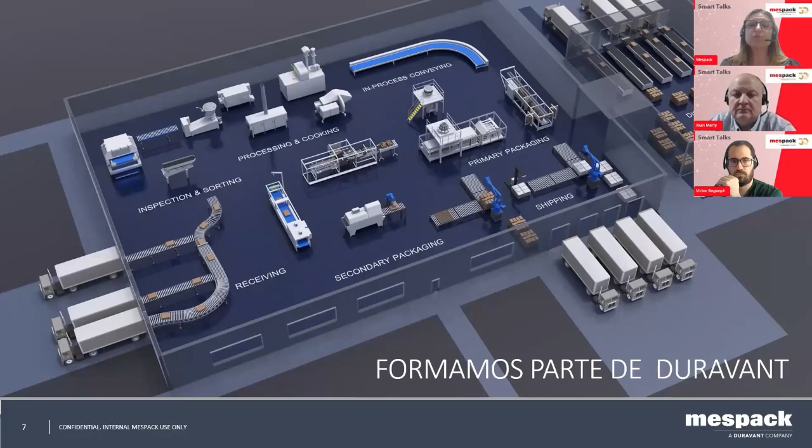So today we are going to cover different topics about turnkey solutions and secondary packaging. But first, let me give you a quick overview of Mespack. Mespack is headquartered in Barcelona and is a global leader of flexible packaging equipment for consumer packaged goods. We are known for our innovation and creating sustainable packaging solutions. We are part of Duravant since 2015. Duravant is a leading player in the world of industrial equipment headquartered in Illinois. It's a global engineered equipment company with manufacturing, sales, and service facilities throughout North America, Europe, and Asia.

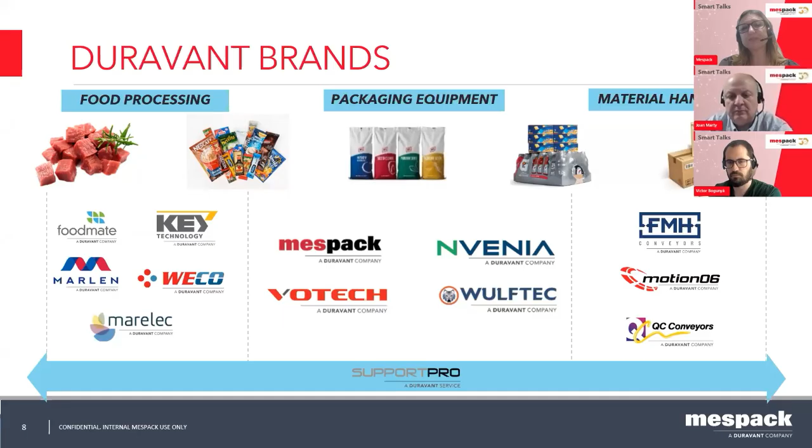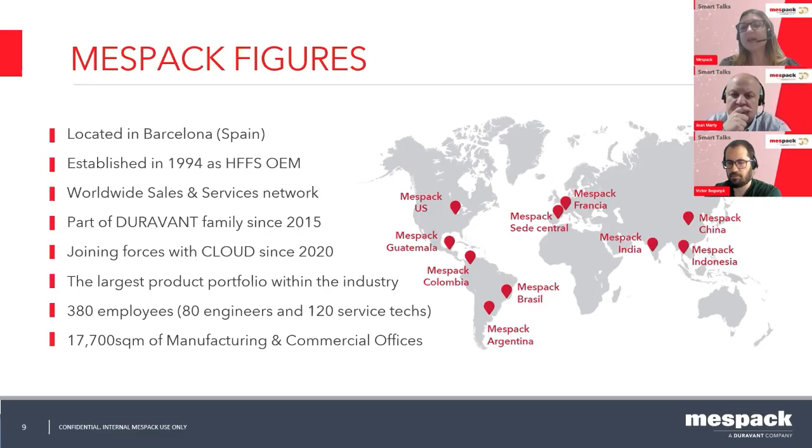Here you can see that Duravant offers immediate and lifelong aftermarket support, serving food processing, packaging, and material handling industries worldwide through its diverse portfolio of operating companies and brands. Mespack was established in 1994 as a horizontal form, fill, and seal manufacturer. Mespack has evolved into a global one-stop shop with extensive services, with a sales team in over 90 countries and regional service centers, ensuring prompt access to parts. We boast the industry's largest product portfolio, with 380 employees across 17,700 square meters of facilities; our production centers are in Spain, the US, and India.

We provide solutions for various industries, including food, beverage, pet food, pharmaceuticals, personal care, and home care, but also lawn and garden, agriculture, tobacco, automotive, among others. At Mespack, our talented engineering team designs customized integrated solutions for primary, secondary packaging, and end-of-line processes, as we will see today. We offer high precision, efficient, and versatile horizontal form fill seal machines for flexible packaging, including machinery for pre-made pouches and a wide range of vertical form fill and seal equipment. Additionally, we provide Hydroforma machines for water-soluble pods and end-of-line equipment for your secondary packaging needs, offering turnkey solutions and a complete project if required.

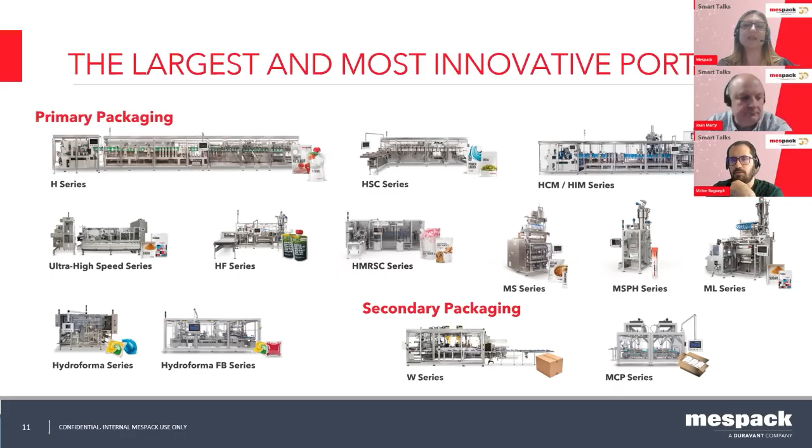So we will go into more detail on this today. This marks the end of our introduction to Mespack, giving you the opportunity to familiarize yourself a little bit more with who we are. And now, Joan, I'll pass the floor to you. Thank you.

Thank you, Monica. Well, first of all, in order to have a clear picture, we would like to show you a video of a recent project that we manufactured here in Barcelona, and that is near to be delivered. It will allow you to better understand, surely most of you know, what we can propose to you. Okay, so.

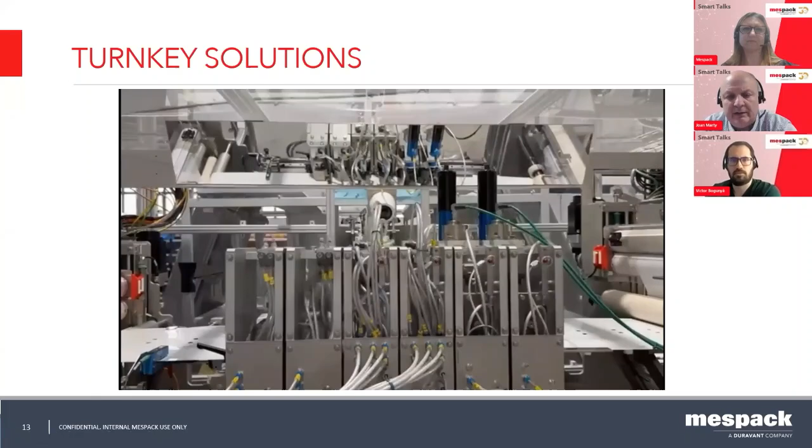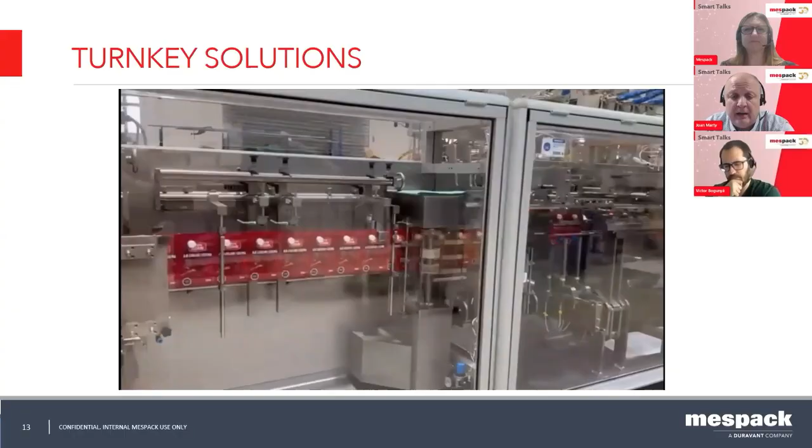Okay, this is our horizontal machine model 320. That is a duplex machine, and for this project we are filling pouches with 400 or 600 grams of paste, mayonnaise, or tomato paste. Also, in this format, you can see it is around 300 grams.

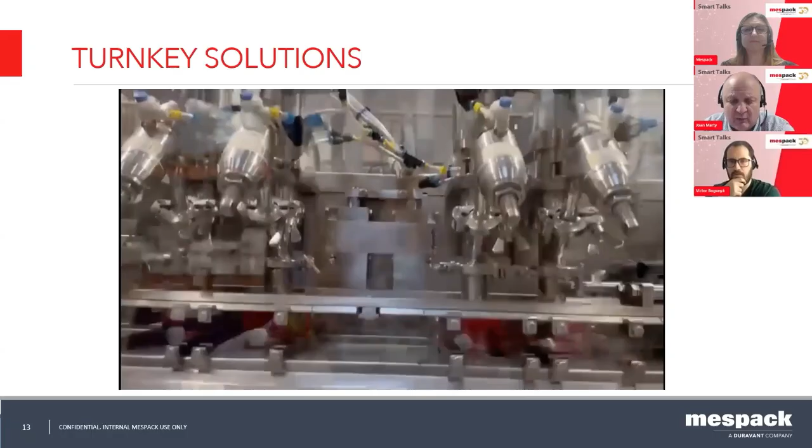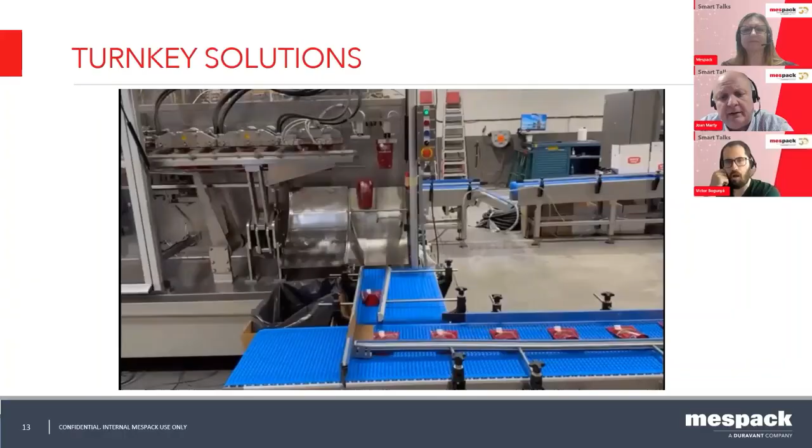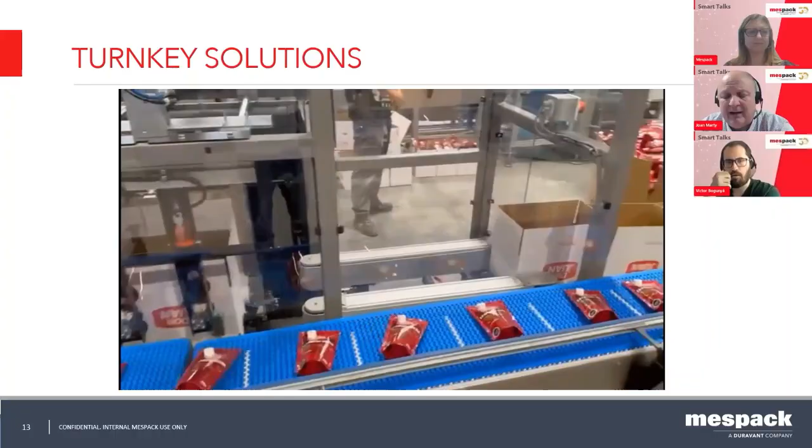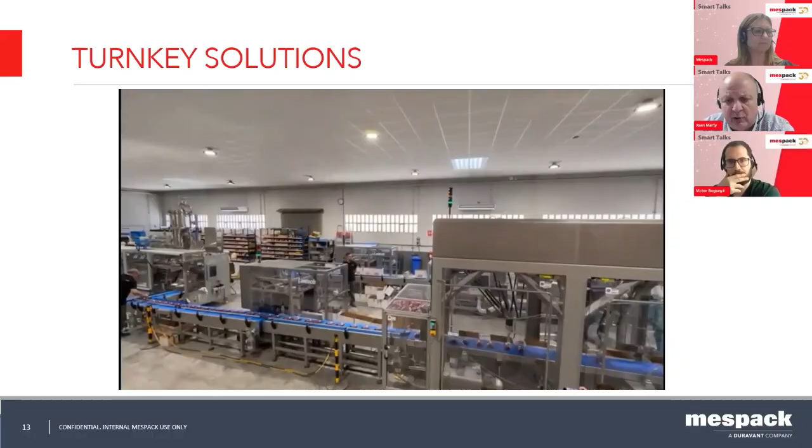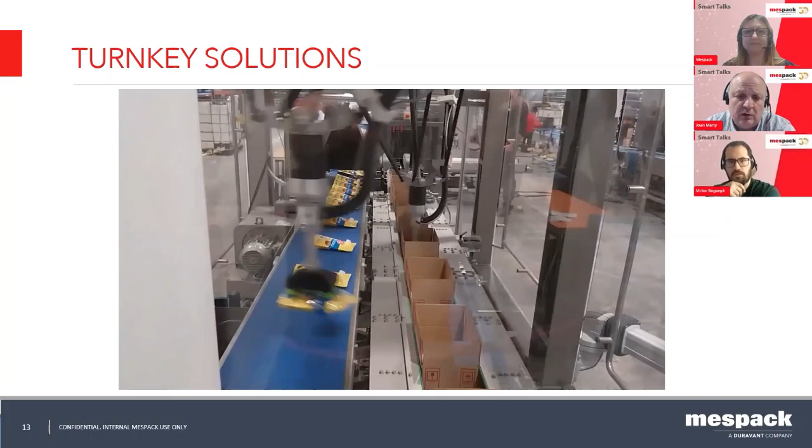For this project we have an independent case erector, so this allows that all the boxes arrive empty, and the product is passing to the conveyor and to the vision system, not only to know the position of the pouch, but also to control the measurements of the pouch and even the shape of the pouch, because it's three-dimensional.

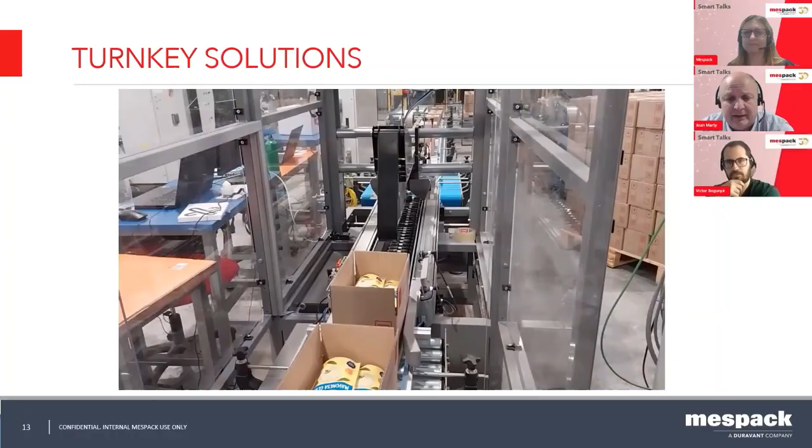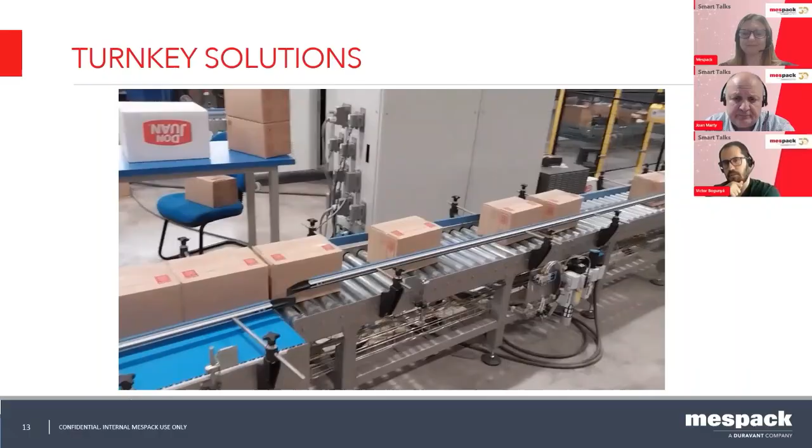At the exit, when the box is completely full, we are going directly to the case sealer. Also, in this case, it is an independent case sealer, and this one is for tape. It can also be by glue, as you know. And later on, we are going to the palletizer cell.

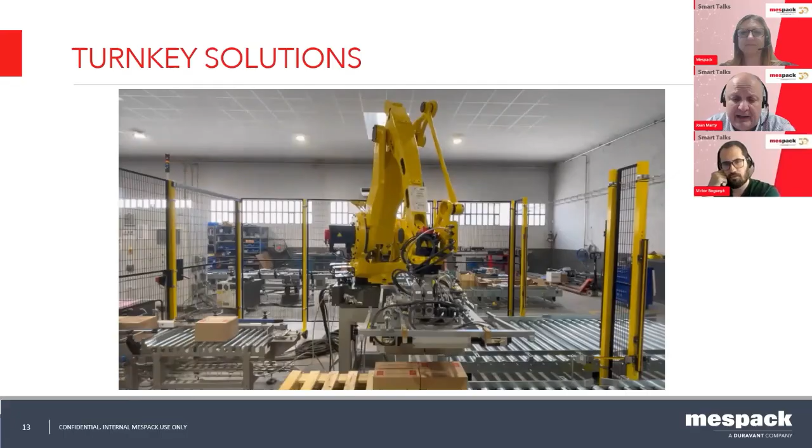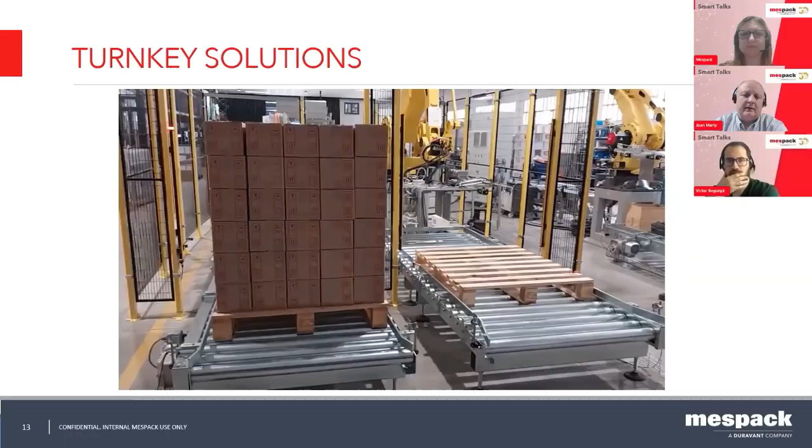This is a palletizing cell with one entrance of the empty pallet, then the filling station where we are placing all the layers of the boxes, and the exit of the full pallet. So a basic pallet cell. Okay, so this is just a small view of what we can see as a turnkey project.

Another example, also very famous for us, is to have the same scenario, but also with a hydroforma to produce the pots. Then we have the horizontal machine where we fill all the pots into the doy pack, then the doy packs into the case, and then the case to the pallet. So for all this turnkey project, Mespack can accompany you and give you a solution as a unique supplier.

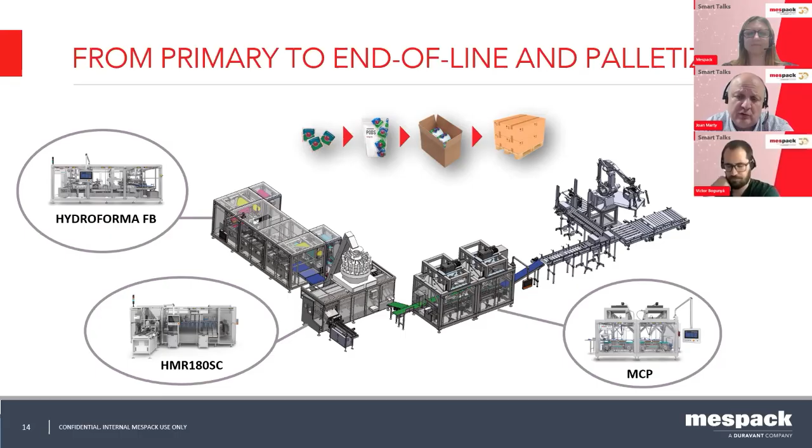Okay, now it is important to start to discuss the considerations that we need to take care of when we are deciding on a turnkey project. The important point is that Mespack can accompany you in all these kinds of decisions. And let's see some particular considerations. So which product and package do I need?

It's not the same to work with liquid, with powder, or with solids. All these different products and sizes give you a different reaction when we go to the pouch and to the box, and okay, for the pallet it will remain the same, but these considerations have to be taken into account because we manage them differently. If it's coffee, sauce, or noodles, this is also important when we take the decision to go for the complete turnkey project. So different sizes, different weights, different shapes. This is something that we consider.

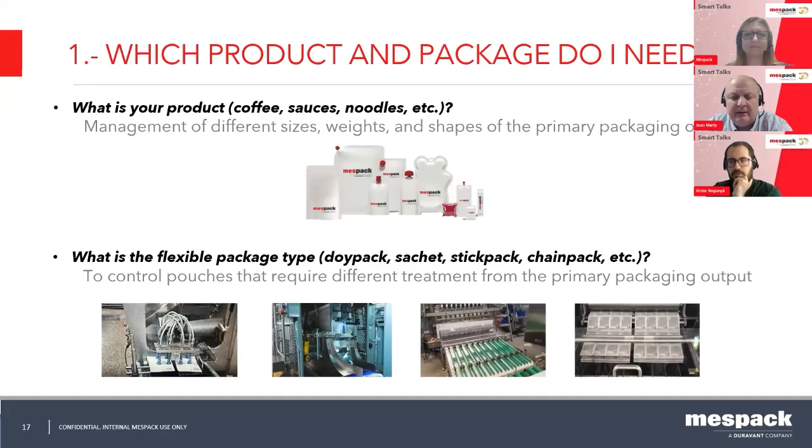Then, what is the type of flexible package? It can be a doy pack, a sachet, or a stick pack. Controlling all the pouches from the beginning requires different treatments, because at the exit we can go by ram or by pick and place, or many exits coming from the primary packaging to the secondary.

Okay, then it's essential to know the tolerance of the package in order to have a highly efficient solution. The dimensions and the weights of the flexible package are something that we at Mespack control from the beginning, because we are supplying you the primary packaging. This will allow us to take the right decision when we place the product into the box, whether we go top loading or side loading. This is something that we will see later on.

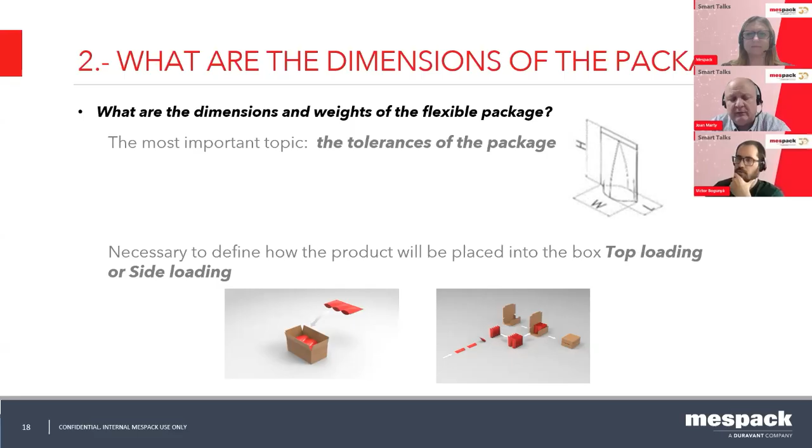So, as mentioned, how the product will be delivered to the machine from the primary packaging. Controlling the exit of the primary packaging is essential to assure the right link between the primary and secondary, because it's not the same when the pouches arrive with a certain distance as when they are going one after the other, very near. So all these points are important when we decide the secondary packaging.

Also, to calculate enough buffer to avoid stops from the primary, or if we have micro stops in the case packer, we have the possibility to have a controlled reject. Then the warranty of the integration of both machines. It's not only a question of sending the on/off signal, that is easy, but it is also important to have all the data from one machine to another.

Now let me show you a video where we can see another system, from a horizontal machine with a pick and place. And if we need, for instance, to turn the sachet, this case is for sachet, in order to place it in a cartoner machine. So this gives us a small footprint with high efficiency.

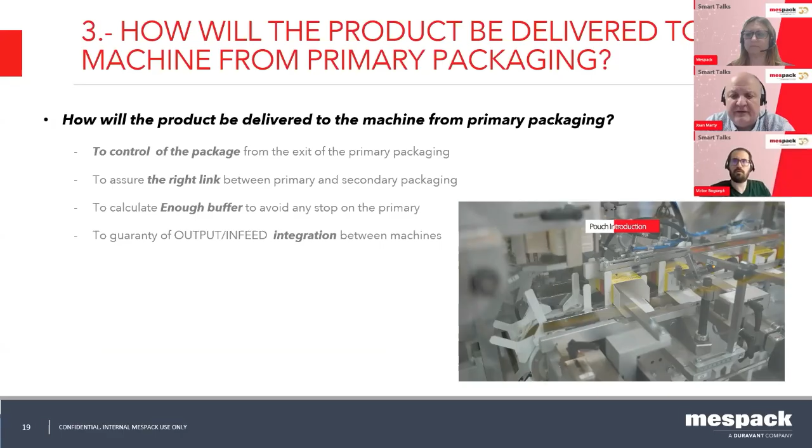Then, what would you like to see happen when opening the case? This is also, when we decide to have a turnkey project, what our end user wants to see when he's opening the box. So the product collation in the box and the product facing are also points to take into consideration. Also, whether we want to use the box as a display or just a box for transport. This is also a consideration to be aware of.

When is the best moment to solve the questions? Will the package be delivered upright or vertical? If we are going from a horizontal or vertical machine, do we want the pouch upright or in flat position? Which direction will the package be facing up and entering the machine, short or long side leading? Which direction should the package printing or label face?

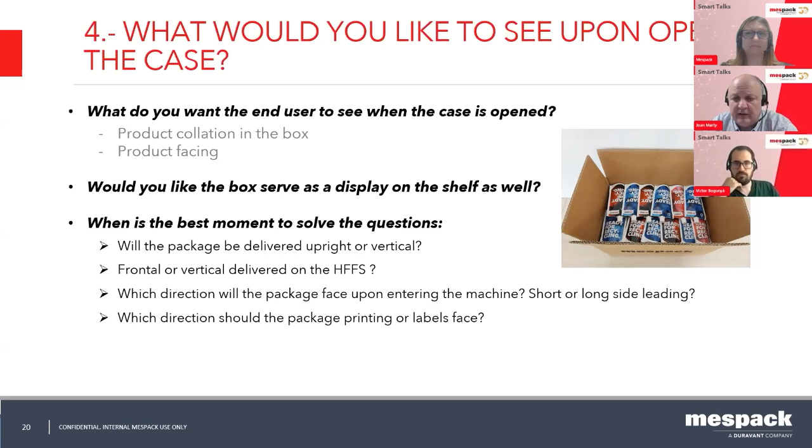Well, the answer is very easy. When is the best moment to solve the questions? It is when we buy the primary packaging. Even if you are not ready at this moment to make the investment for the case packer, all these questions have to be answered in that moment, because it will save you money for the future.

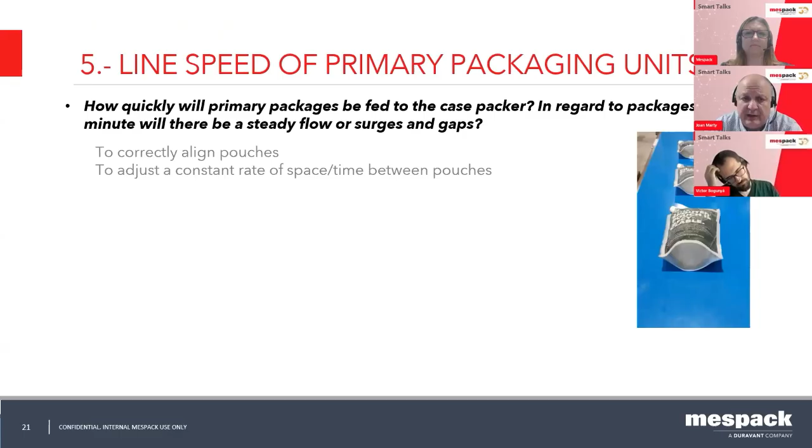Another consideration: line speed of primary packaging units. How quickly will primary packaging be fed to the case packer? In regards to packages per minute, will there be a steady flow or surges and gaps? So the correct alignment between the pouches and a constant speed are very important points when we have secondary packaging, a case packer, because if they are not arriving at the right time, we will have some fails during the case packing process.

And how many cases per minute are produced according to the number of pouches in the box? So these versatile solutions take into consideration the quantity of the pouches, and we have solutions for wraparound boxes and for American boxes with a compact or independent case erector and independent case sealer, depending on the solution.

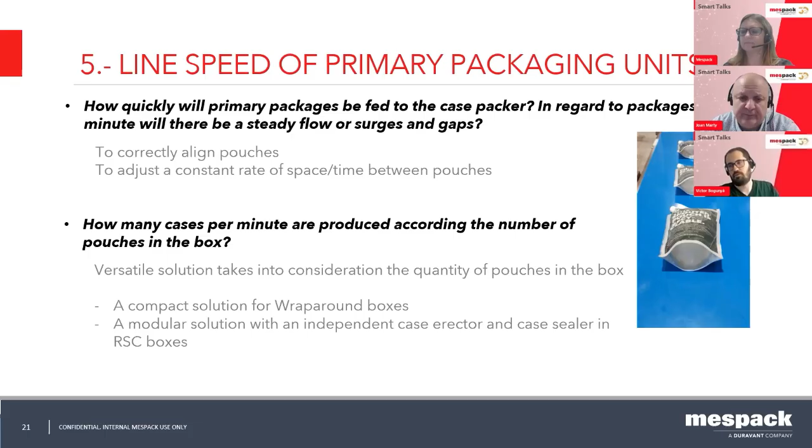Next slide, let me see. Yes, case count and collation pattern. This is also necessary to decide when we buy case packers: how many products will be inside each box, and what collation or pack pattern we want. Here we have a solution that Victor will go deeper into later on. Top loading is done with a Cartesian system or Delta robots, as we see in the video, always with an indexing train conveyor or grouping table.

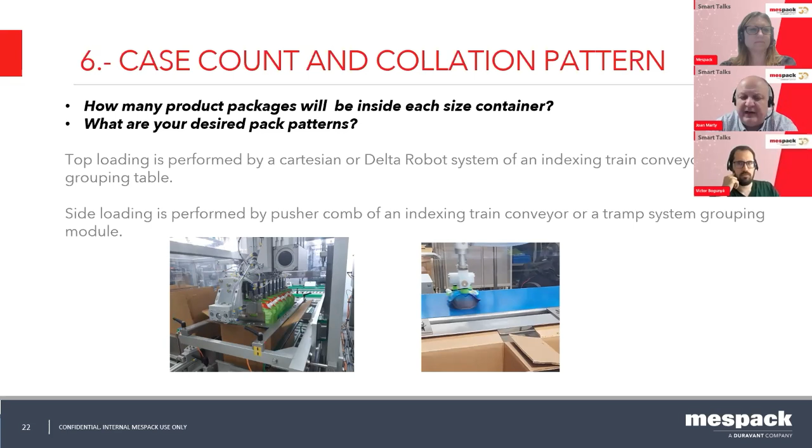That means we have a stacker belt where we prepare the collation before it is picked and filled inside the box. Also, side loading is done by pusher or tram system. So we have different solutions according to the pallet pattern, the pack pattern. What are the needs of your business?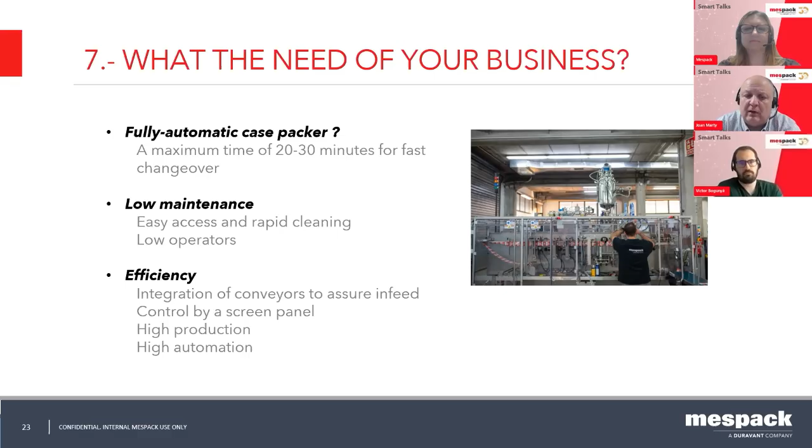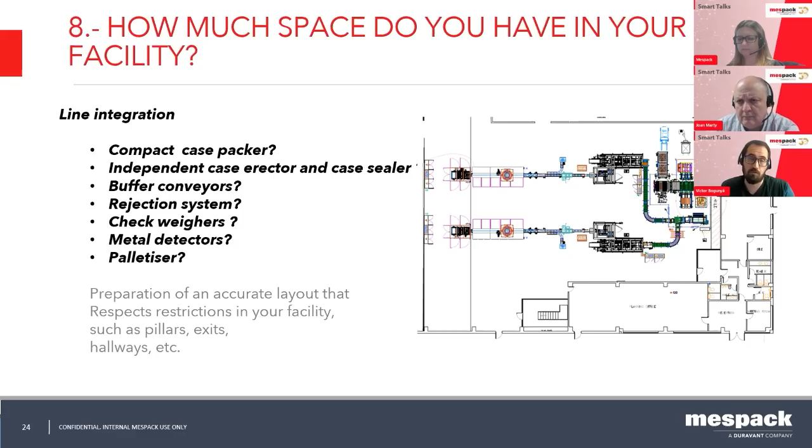because even if it's an important part of our portfolio, we feel that it's quite unknown. And most of the time, it's an integral part of the turnkey solutions that we deliver. Here in this presentation, we wanted to showcase 3 possibilities, although we are able to provide much more than we're going to showcase today, but we wanted to reduce it to the most significant solutions that we provide currently.

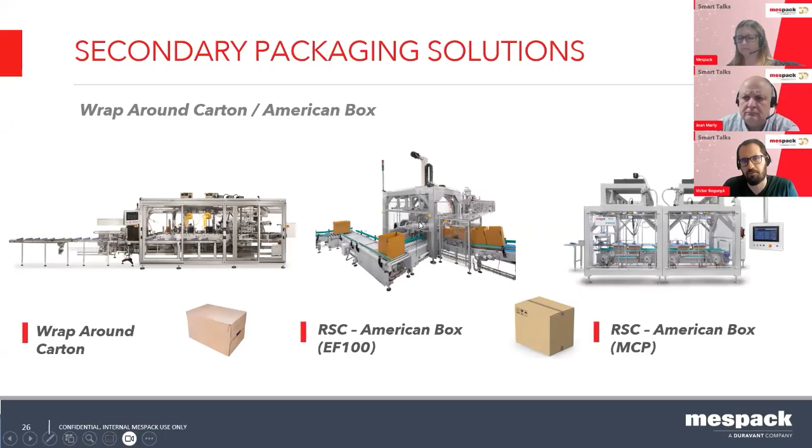And they categorize in 2 main groups, wraparound solutions and American box solutions. Today we're going to talk about our wraparound models and our RSC American box models: the EF100 for vertical introduction and the MCP for horizontal laying of the pouches into the American box.

Okay, wraparound machines. Our portfolio covers at least 5 families of machines, and each machine is suitable for different speeds, different products. But long story short, wraparound solutions are usually very suitable when we try to basically optimize the dimensions of the box, or when we intend to use the box as a display box. These are the 2 main scenarios where we highly recommend to use these kind of solutions.

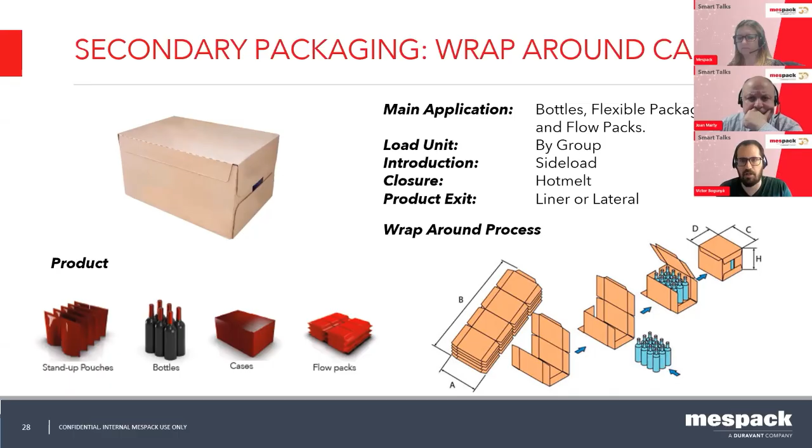In this scenario, we can use the solution both for rigids like bottles, glass bottles, plastic bottles, or flexible packaging, either stand-up pouches, flow packs, all kind of flexible packaging. In the wraparound solutions, basically we have 3 options in the way that we insert the pouches into the box. The box is delivered as a blank. We pre-fold the box, and then we proceed to insert the product inside.

Usually with rigids and with stand-up pouches, what we do is we group it, and then we insert it either front or side. But we also have the option to do individual picking, positioning the pouches individually, and this is very suitable for some flexible packaging applications. This technology is suitable both for wraparound boxes, but also for trays and lids. This is the same machine, it's a very modular approach, and we just need to configure it accordingly.

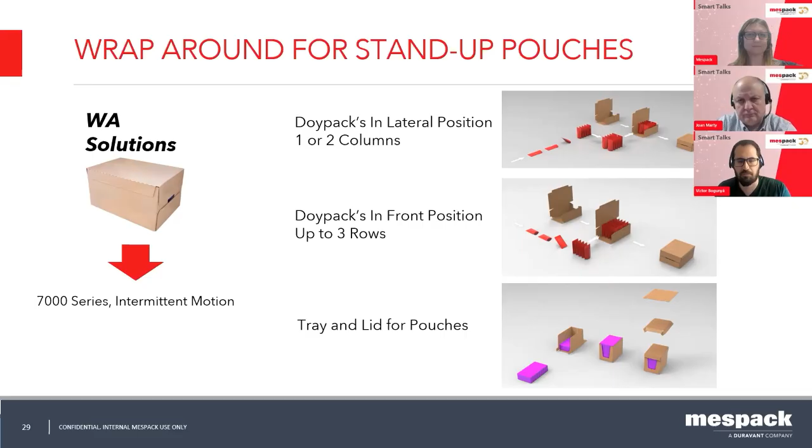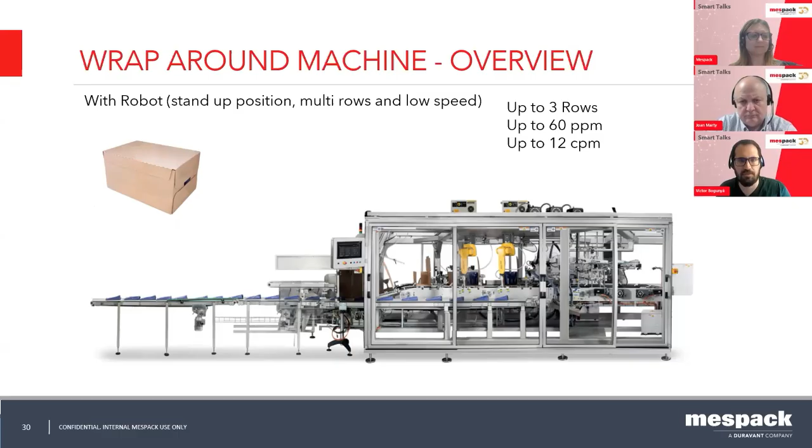Another interesting option is to use the same equipment to just make trays, introduce the product into trays, and then use a shrink wrap to secure the product in. As mentioned, we have basically two possibilities in wraparound solutions when we are dealing with flexible packaging. Either we use robotic solutions to do single picking, individual picking of the product with a vision system and tracking, and introduce it into the wraparound box.

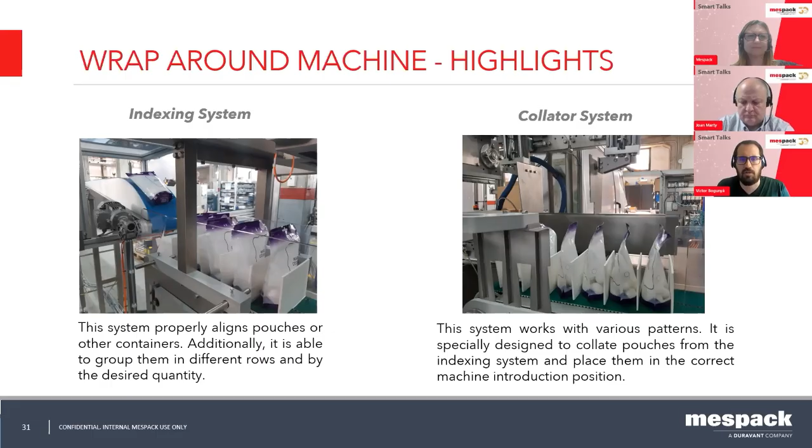Or we can do grouping, and the grouping is done basically with an indexing system. The product usually comes short side leading on the infeed conveyor belt in a single line, and then we use an indexer to group the product in rows, and then we generate a combination of columns of product that we introduce into the box by means of pushing the whole combination.

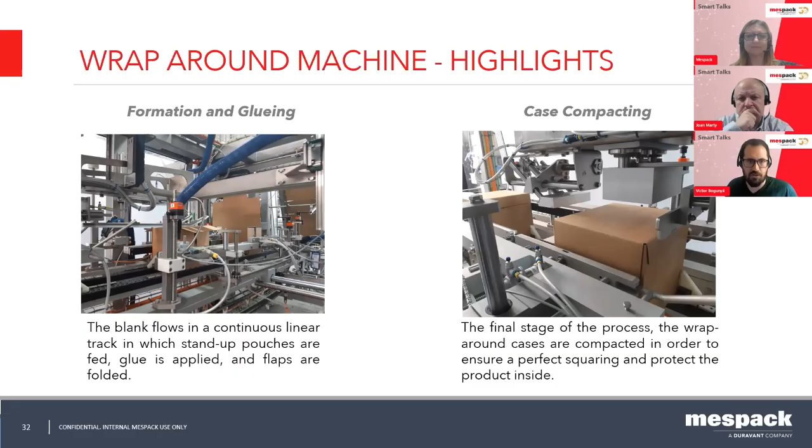And what is very interesting about this approach is that even if the infeed of the product may vary, because we're going to adapt the infeed of the product to each particular case, the machine itself is invariant, it doesn't change. It has the same forming module and the same compacting and closing modules. And this can be summed up in this slide here, where we present the whole family of wraparound machines. We have these 5 members of the family, and each one is suitable for different speeds and box sizes.

The smaller members of the family, the 7000 and the 7200, are intermittent motion, both suitable for rigid and flexible. The 8400 is a little bit higher speed, especially suitable for high-speed flexible applications. And finally, we have the 8500 and the 8600 that are very high speed, intended for rigid. Because this is actually something very important.

In most of our applications, we talk about primary equipment, secondary equipment, and palletizing. But there are some cases where we need primary packaging on primary packaging, like stick packs in Doypack. And sometimes we also need rigid on rigid, for example, cartons on trays. So we're also suited to deliver such kind of solutions, for example, sachets into cartons and cartons into trays prior to palletizing.

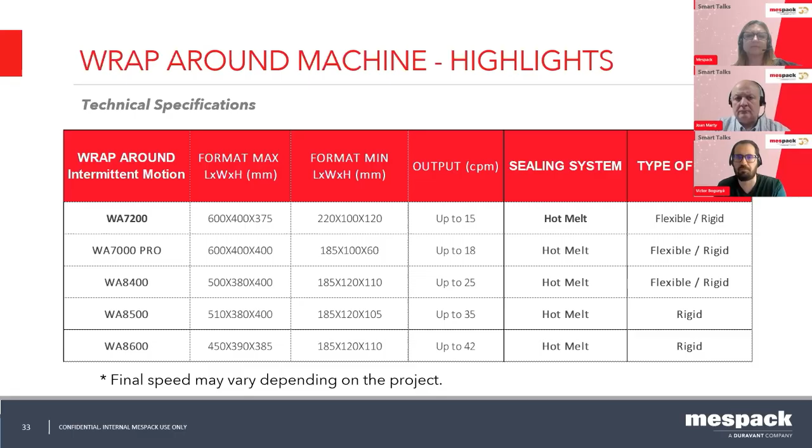When we're talking about American box, as Joan explained earlier, there are 2 main options, and it really depends on what you want when you open the box, how you want the product to be displayed when you open the box. And usually American box is seen as a means of transport. Usually it's not used as a display box, but when we select which is the best way to lay the product into the box, we do that based on considering the product itself.

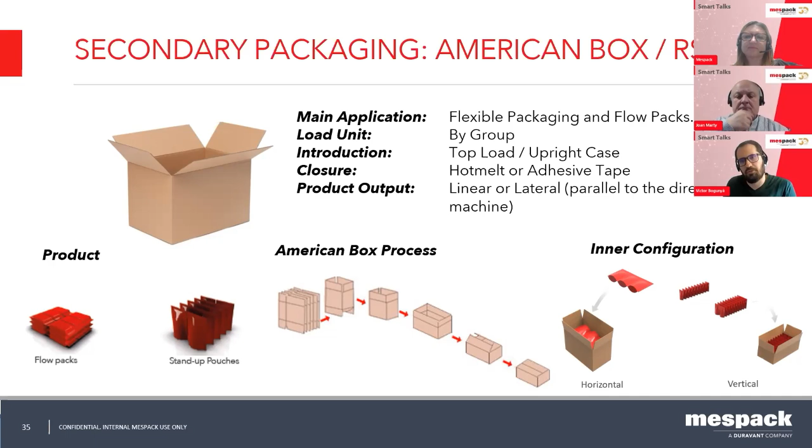Is it a liquid? Is it a powder? Which are the properties of the film? Is it spouted or not? And depending on the product itself that we are transporting, we will recommend a flat positioning or a vertical positioning into the box. In these cases, as Joan explained, we use independent forming and closing modules. So we always start with the blanks of the box. We form the box and glue it or tape it on the bottom, proceed with the filling sequence, and then we close it with the independent module.

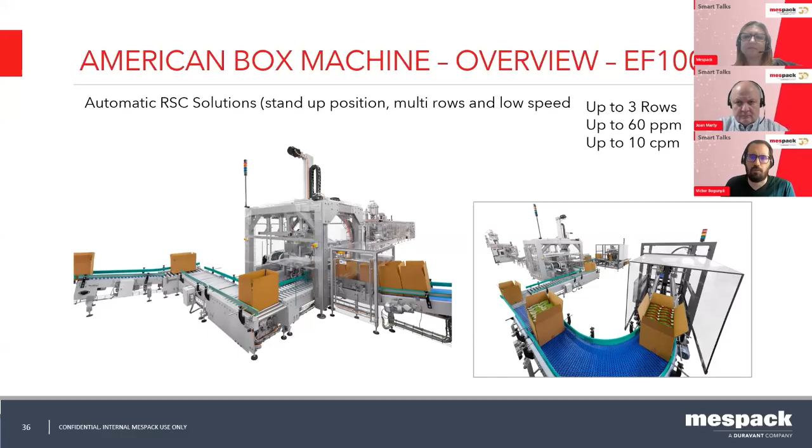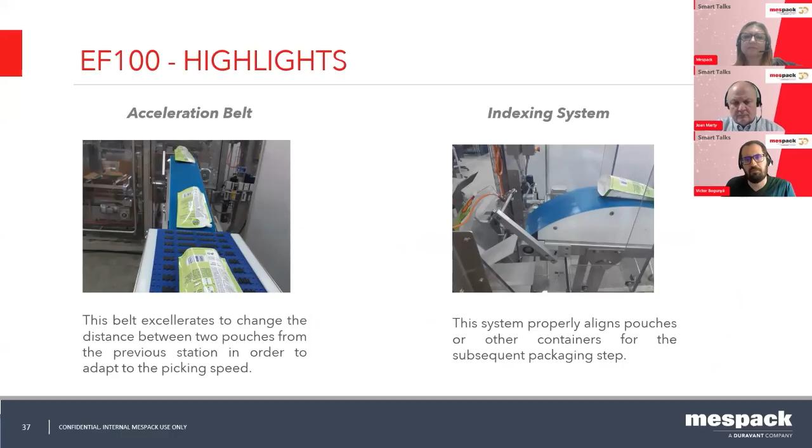The 2 possible solutions that we offer out of the box are the EF100 and the MCP module. The EF100 is intended for vertical loading of the product. So in these kinds of applications, we form the box and then we insert the box into the machine. In the infeed of the product, we have a single line of product short side leading or bottom side leading. We use an indexing system with an acceleration belt to index the product and generate the sequence that we want to introduce into the box.

And then we can do it as a single row or as a multiple row, and then we take the whole set of product that goes into a box, compress it, and introduce it with a Cartesian style robot. This solution is very, very suitable for low speed, high efficiency lines that are designed to run 1 or 2 products. So it's a very efficient solution, but not so much intended for quick changeovers. It is intended to have single product lines.

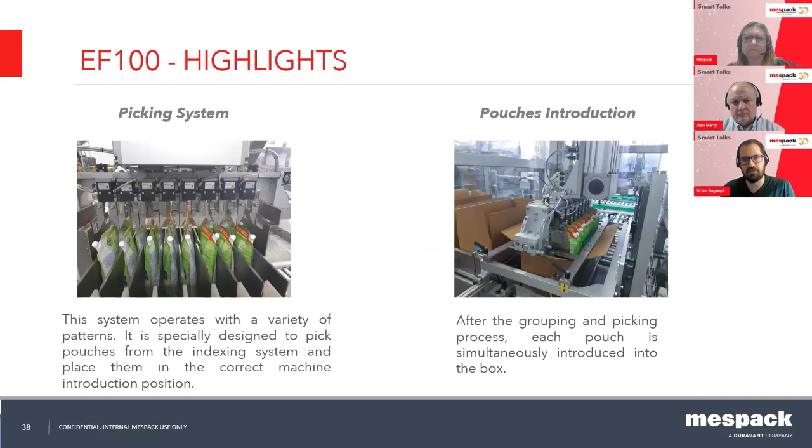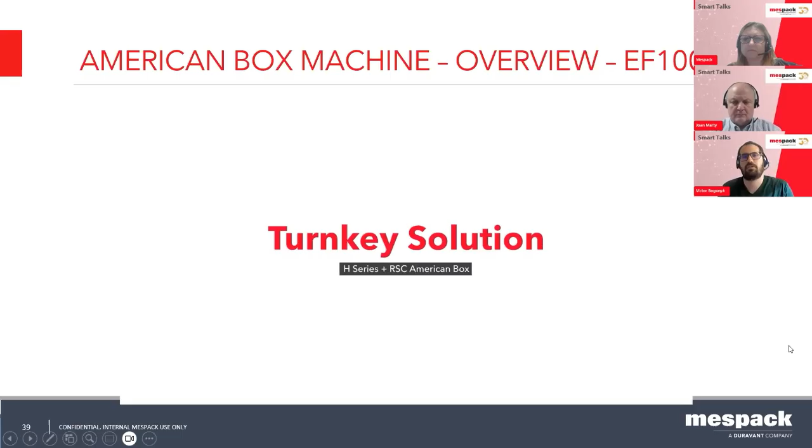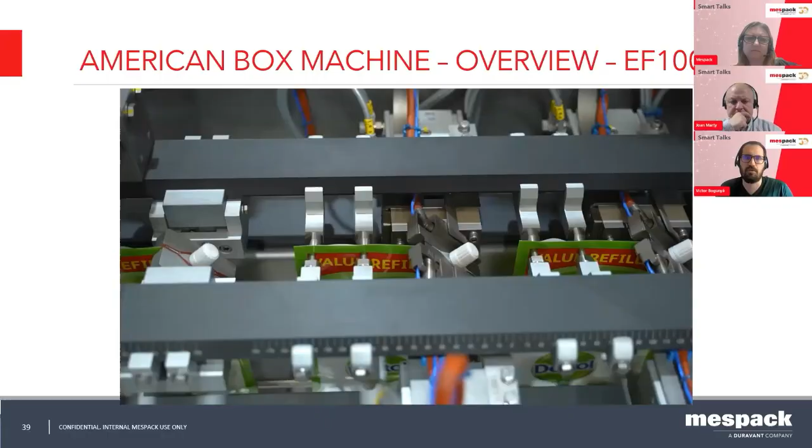Here we have a small video of one solution that we delivered around a year ago. It was 2 complete lines with this concept, a primary packaging machine, a duplex Doypack style machine with corner spout. This was soap, it was liquid, and because of the product and the amount of weight that we were filling into the Doypacks, we considered the best option to have it delivered into the box vertical. That's why we proceeded to use the EF100 solution.

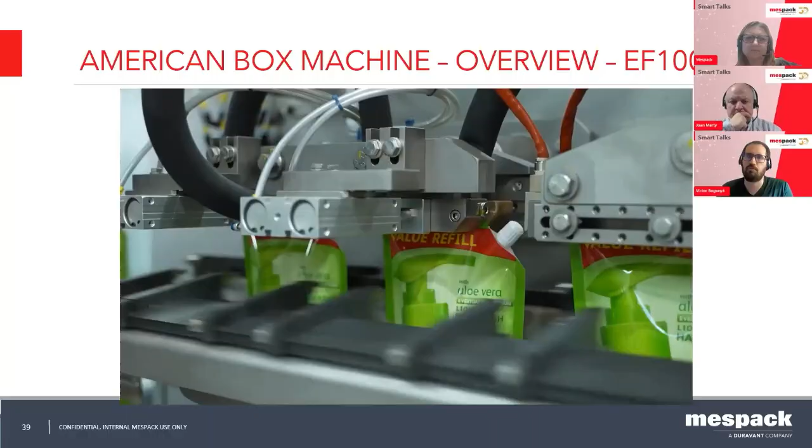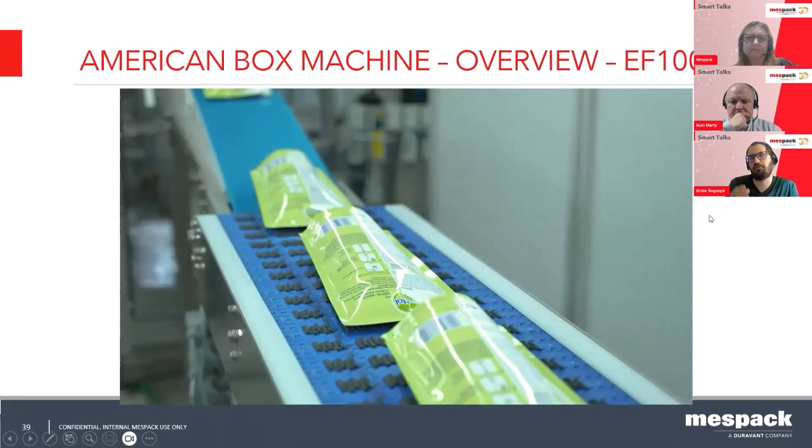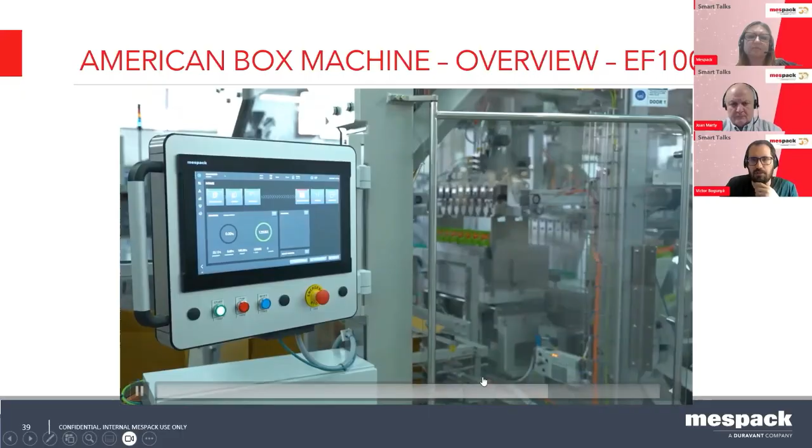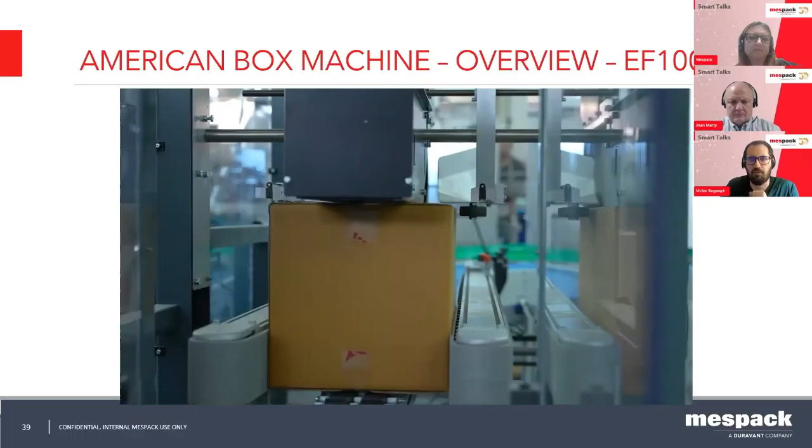One very interesting fact is that as we are providing the complete solution, we are very mindful of how the product is delivered from the primary to the secondary equipment. And this gives us a lot of flexibility because we control how we deliver the product, and we don't need to find solutions to deal with product that comes in an uncontrolled manner. We form the boxes, and then we group with the indexing system. In this case, it's 2 rows of 12 pouches, and we insert it into the box in one movement. And again, we use the independent closing module, tape-based in this case.

On the other hand, here are some specifications on the model. Again, we can do it both tape or hot melt, and this can run up to 25 cases per minute. The other side of the spectrum will be the MCP model. This is a completely different approach, as we come with a very modular design. We can concatenate up to 4 or even 5 delta modules one after the other. So this makes this solution very suitable for many projects, as we can adapt it to the throughput of the primary packaging equipment, and also make it retrofittable in case we want to add a module in the future.

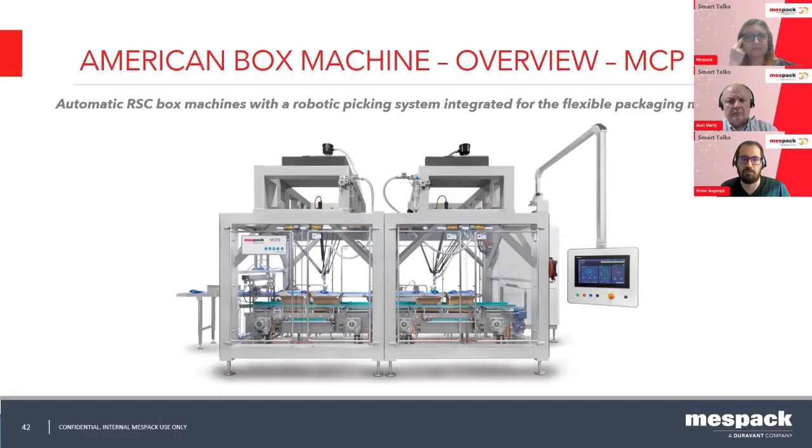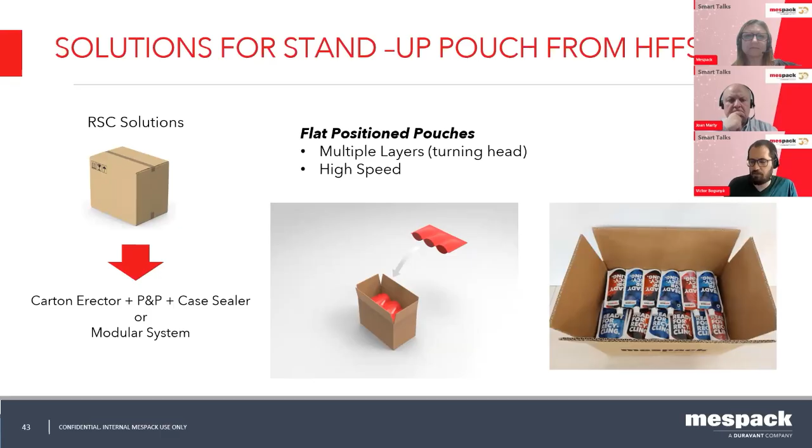This solution is especially suitable for laying the product flat. We usually do single picking, although we could potentially do double or triple picking too. This system is based on a vision system. We use a scanner to detect the product coming in. This gives us a lot of versatility because we don't need to have absolute control of the positioning of the pouch. And we can absorb some variations in the positioning of the pouch because the Delta robots come with a 4th axis, a rotation axis, that allows us to pick the pouch in any possible position and deliver it in the box in the right positioning.

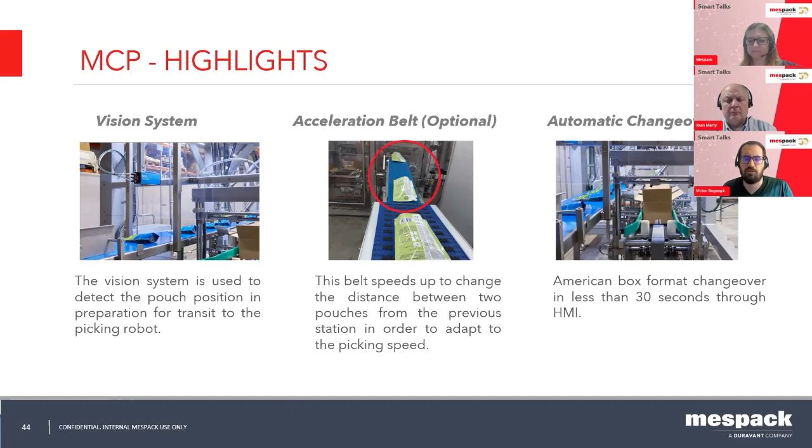Of course, we usually have to control the infeed of the product, not only with an acceleration belt. Sometimes we also need to add equalizers in case of powdery products, or in case we need to ensure that the product comes in a homogeneous way. And this model also comes with automatic changeover options to make the changeover faster. Of course, we need to control the flaps of the American box to ensure that the pick and place distance in terms of the Z dimension is minimized, and we can deliver very fast speeds.

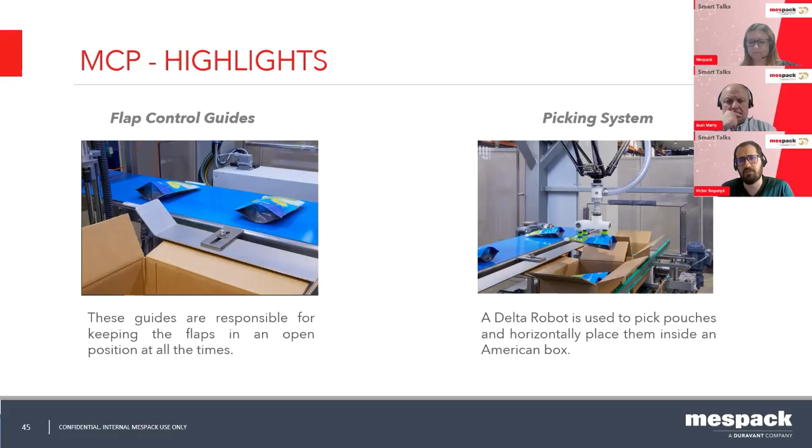This machine, as built, is able to deliver 50-55 pouches per minute, pick and place operations per minute, per robot, of course. And the picking system is based on vacuum. We have the option of doing it with a vacuum turbine or with Venturi heads. It really depends on the changeover and the changeover tools that we want for each particular product.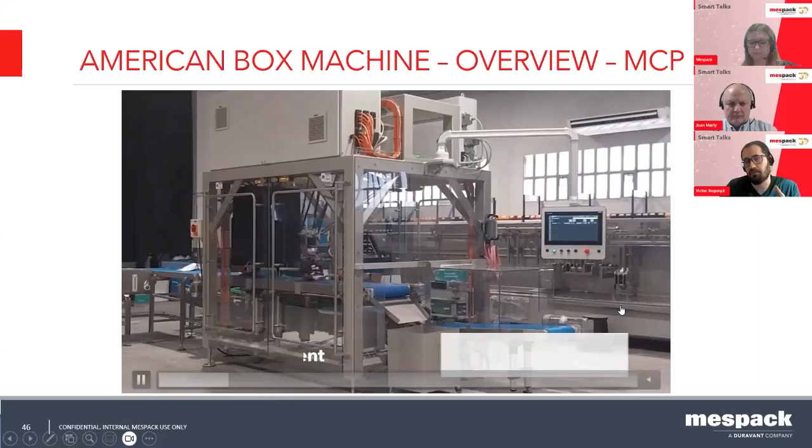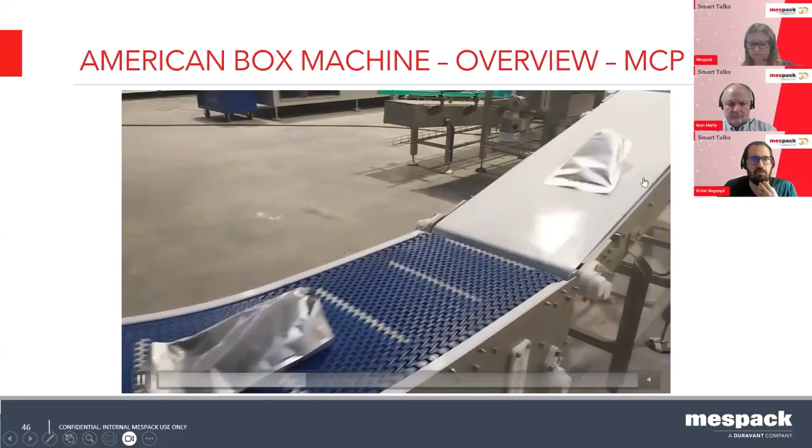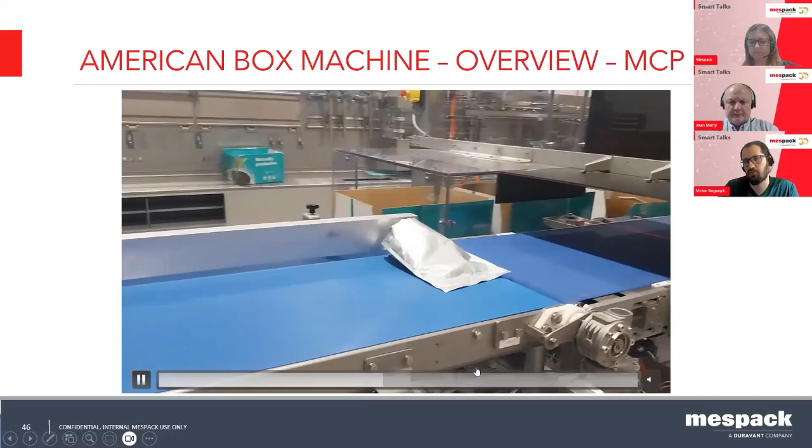In this case, we want to showcase a project that we delivered around half a year ago. You will see only the MCP1 model, because it was a retrofit. The customer already had our primary equipment and requested to deliver a secondary equipment after, and we designed this machine especially for them. It is a challenging equipment because it was designed to be able to pick and place products from 100 grams to 5 kilograms. The range of product was huge, and still we were able to deliver a single solution with a single robot to box all of the range of products the primary packaging machine was producing.

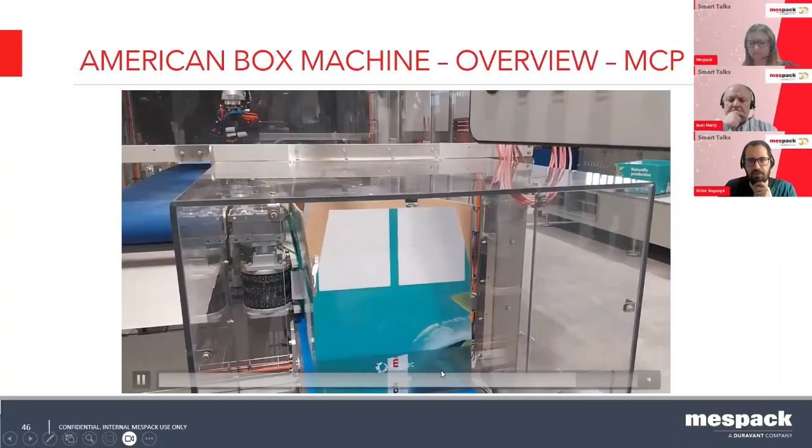In this case, we selected quite a special robot with an extra Z movement in the axis because some of the pouches were very, very heavy, up to 5 kilograms. We didn't want to drop the pouch from the top of the box. We want to do full insertion of the product into the box to ensure good positioning and no product damage. And again, same concept. We are forming the boxes in an independent module and closing the boxes in an independent module.

Having explained the different secondary solutions that we have in the portfolio, the question is, why would you, a customer, request our services for a turnkey project? And here we talk from experience. Most of us are engineers. We come from programming backgrounds, mechanical engineering backgrounds, and even commissioning backgrounds. And we understand that one of the biggest challenges that our customers have is the integration of different equipments into a line. Mespack wants to be a key partner for all of our customers by delivering complete solutions from beginning to end. And this has many benefits.

The first of all is that you have a sole responsible for the whole line. And this has a huge implication because you are delegating the responsibility of the success of the project entirely to us. And we are eliminating all the problems that come with the communication between the different parts involved in a big project like this. By having the ability of designing, building, and delivering the whole solution as Mespack, we are not only providing single machines that we are putting together, we are providing a complete solution.